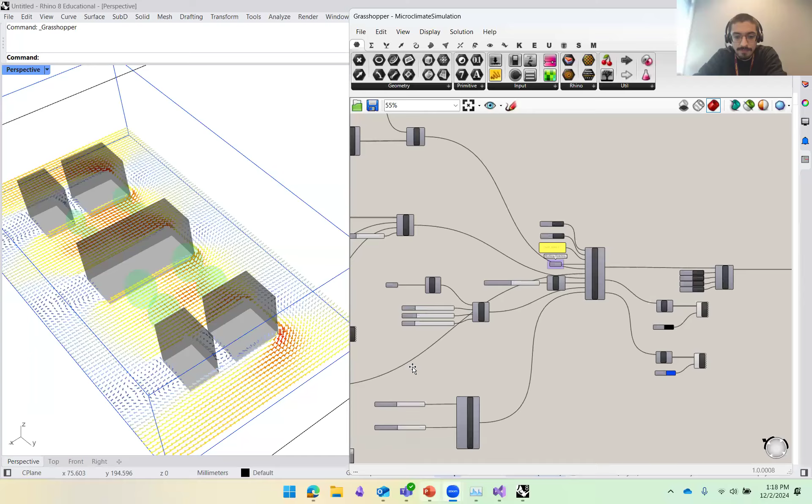Okay, thank you Patrick. Do you see the slides? Yes, we can see the screen. Thank you, okay.

Good day everyone. We're part of this team called Microclimate-UMCF, with UMCF coming from the Urban Microclimate Foam Solver. Our full team is quite large - we have Patrick leading this effort, me, Gonzalo, in charge of the main development of the plugin architecture. Marcelo here is also supporting that effort and working on some of the testing of the plugin. Chinmay is working primarily on the vegetation parameters, and Shruti is designing some case studies so we can run this on.

Sina is not here, I believe - he was supporting us on the technical side, the validation. And Ray, who's also not here, supported us in some testing, fixing some bugs, and general technical problem solving. Like Patrick said, this started with Perkins and Will as an internship when I started the development of this, and also with seniors from the Toronto Metropolitan University, so in a way it's like a partnership.

I'll be talking primarily about Metafoam, which is this platform we designed to, in broad terms, facilitate the implementation of Grasshopper plugins based on OpenFOAM cases. The Metafoam platform has three steps I want to talk about.

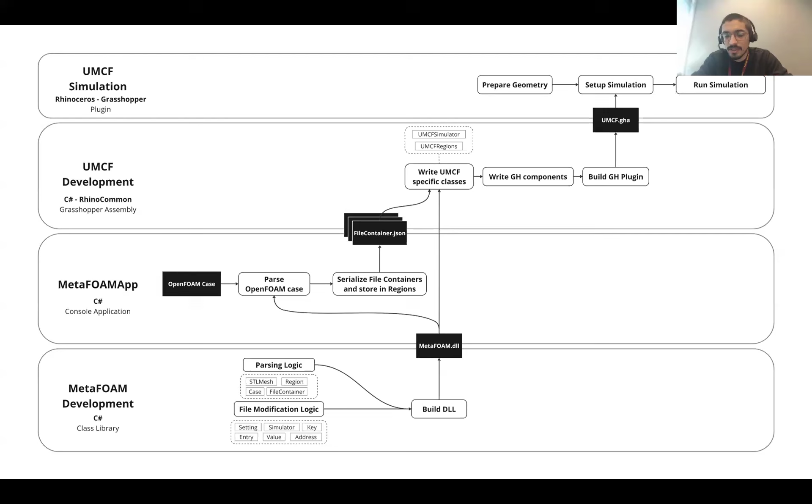So the first one, the MetaFOAM class library, is the class diagram. The first step here is these three classes that are used. The purpose is to just allocate or contain multiple files.

Directory containers are the more basic abstract class used by the case and the region. This one only provides some functionality to get file containers. The region itself is pointing to a specific OpenFOAM region, such as air, buildings, or vegetation.

This one stores all the files particular to that region. It also has some logic that can be used later on by a user, can be filled by a user to actually modify the files the way they want.

And the case itself is just a collection of multiple regions. It also contains all the files that do not belong to any regions, which are primarily for the global type of settings of the simulation.

The file container is probably our main class here. It's an abstract class. It contains the address of the file and the content as a C# dictionary. And this dictionary is a nested dictionary of a string and object. There are 4 types of them.

We have the dictionary container, the generic one that contains most settings and the initial conditions of an OpenFOAM file. The list container has weather-related information, which is usually time-based. It's way more simple. The text container is a generic container for anything that's text-based that doesn't necessarily follow the OpenFOAM syntax. And the mesh container just carries the geometry you will be modifying in Rhino.

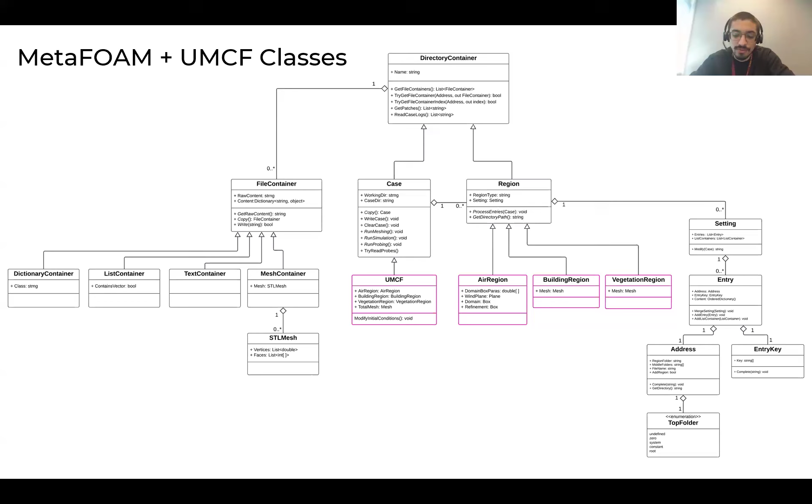This is the same diagram, but now the main difference is that the developer comes in and inherits from the existing classes—from the case, the UMCF class, and from the region we have air, building, and vegetation. So they come in, take the existing library, and add any methods they need to make this work.

So the UMCF one just contains all the file containers. In this case we have three types of regions: air region, building, and vegetation, like I said before, and each one has its own specific requirements. The air region contains information about the simulation domain, including the wind direction and parameters defining the box. The building and vegetation regions contain a mesh with the geometry required to run the simulation.

In addition, they also override the process entries method. This is called on the case, which contains all the file modifications collected through Grasshopper inputs.

The overall features of this plugin: you input the geometry of buildings and vegetation, define a wind speed, direction, building material, and vegetation properties, along with a weather file, start day, start time, and duration. This will output, per hour, the temperature, absolute humidity, wind velocity, and pressure—the main relevant ones. There are more, of course.

In the Grasshopper definition, it looks like this. We'll go through it one by one here.

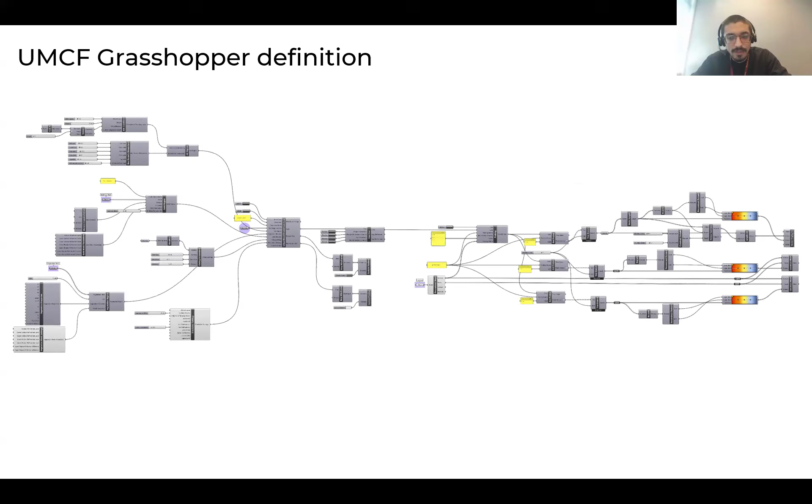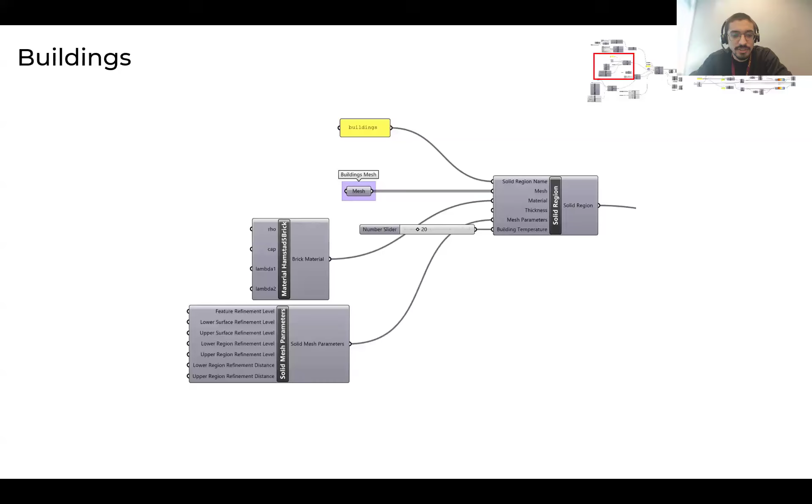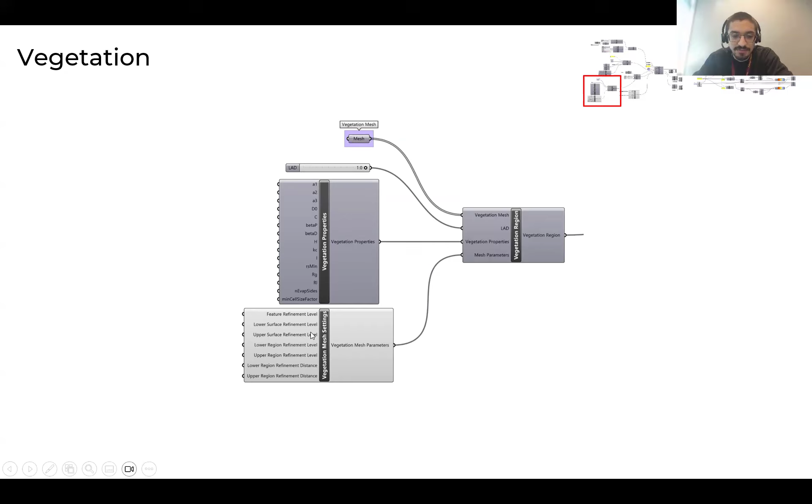For the buildings, you have the actual geometry of the building, the material of the building you're going to use, and parameters defining the refinement of the meshing. Similarly for the vegetation, you have a specific input for the LAD, leaf area density, an array of vegetation properties that Chinmay will be talking more about, and then similar settings for the vegetation mesh.

We also have, of course, several run settings. The main one we're using here is the number of CPUs we're going to run in parallel, and this is the max fluid iteration, which we modify to make the simulation faster when we're testing or not.

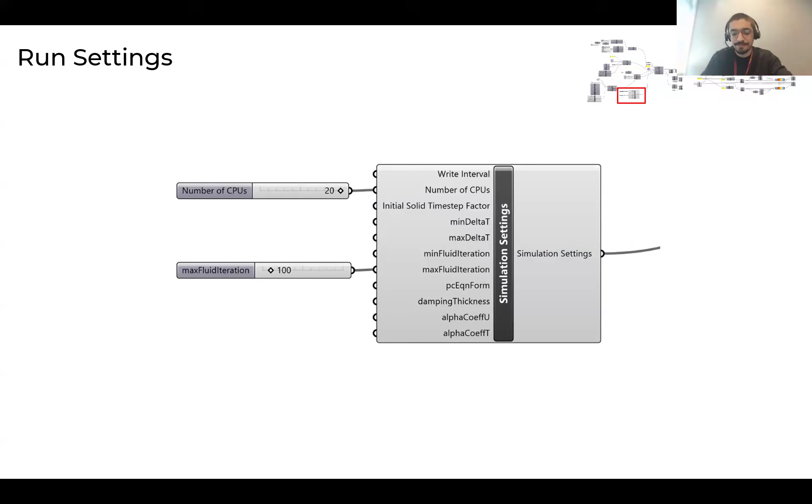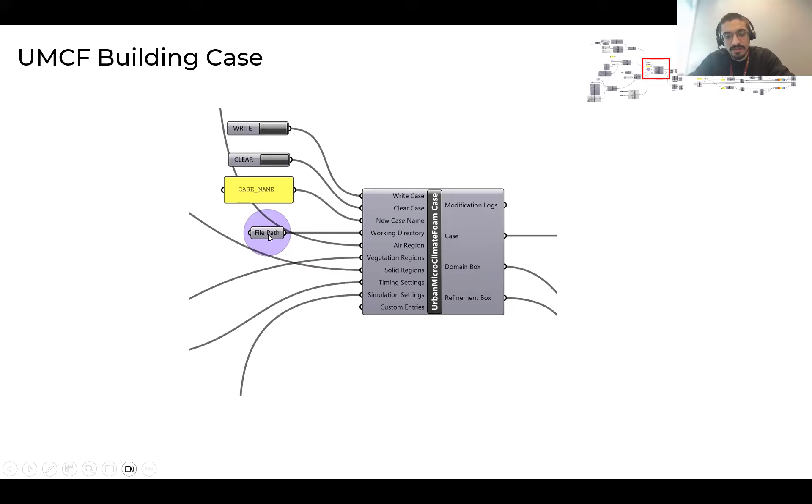And then we have the component that takes everything together, the case. This has an input to just write the case and to clear it. You can also specify the name of the case and the working directory where this will be written.

And then you can just run the case. You have some options to run this in parallel or single: first prepare to get the meshing, and then the running simulation itself.

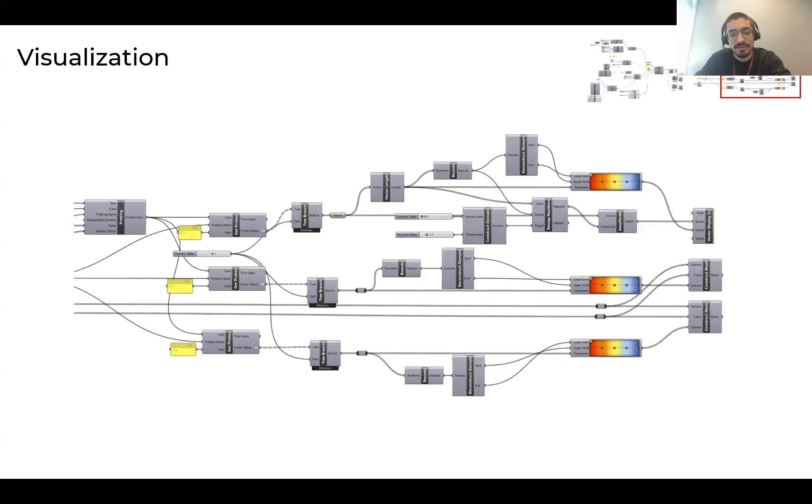And these are just vanilla components from Grasshopper here for visualization, which allow you to see the results directly in Grasshopper, and you get some quick examples, an animation of the results of the temperature and the wind velocity.

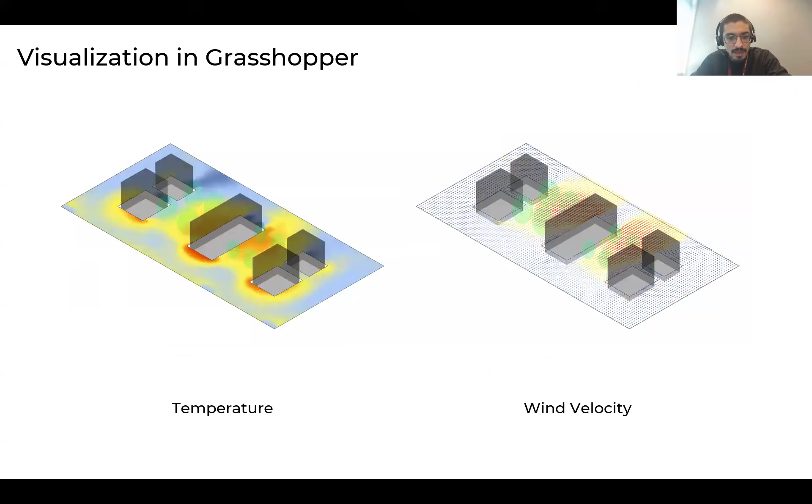But we'll see more of this from Gonzalo later on. And that was it from me. Now Marcelo will take it with the next part.

Hi, can you hear me? Yeah.

Yes, Marcelo, let me say one sentence for the ones that joined later. So Gonzalo led this project, which came out of his internship at Perkins & Will, and there were four more students who investigated sub-issues or sub-problems related to this development as it pertains to meshing, vegetation, canonical test cases, and what am I forgetting? Is that it? And of course, Marcelo, who we're going to hear about right now. So yeah, please continue.

Okay, my work during the semester was two-sided. The first part was to add and develop additional features for the UMCF plugin for Grasshopper, mainly focused on visualization, just because before that we needed to rely on some viewers like ParaView, for example, and it would be a good feature to have some sort of quick visualization and further manipulation of the geometry meshes from the simulation domain results within the Grasshopper environment.

Next slide, please, and just keep going, it will be fast. The first thing is that there is an object called polyMesh that contains all the information related to the points, faces, and cells for the mesh composition of the OpenFOAM geometry, related to the air region, the vegetation region, and the building regions, or the solid region more generically.

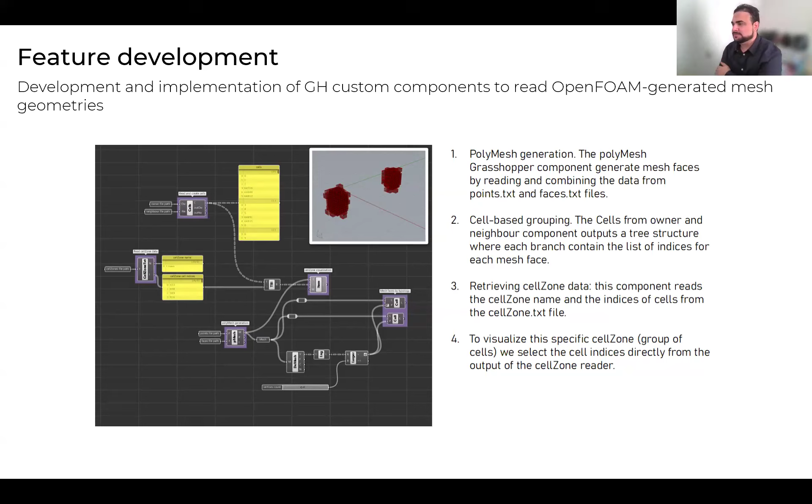So then we did a further optimization because the initial version was just an individual mesh for each cell. Since a lot of these geometries have a high amount of cells, we were able to create a single mesh based on the information, so it works a lot faster and allows further processing in the Grasshopper environment.

Finally, since the plugin started having more updated releases to be used, we integrated this into the UMCF case class to actually work and be fully integrated in the whole workflow of the process.

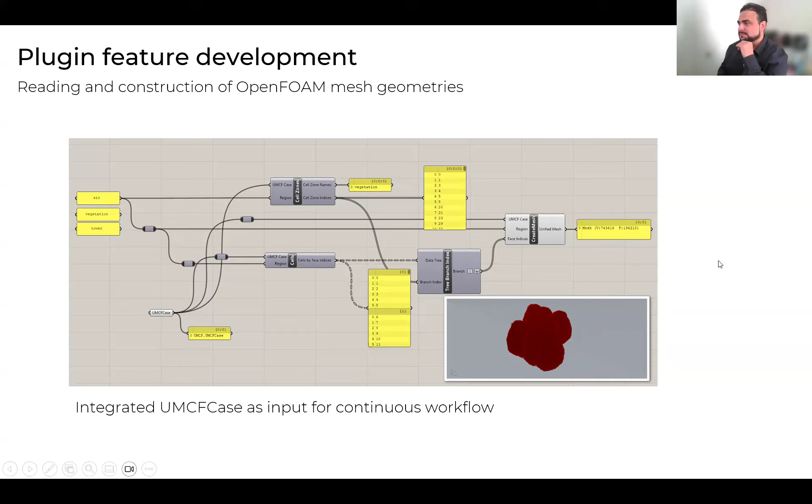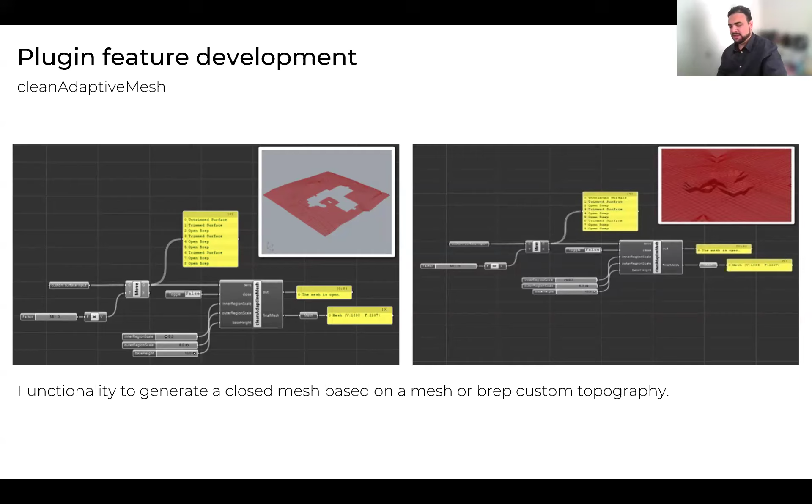This is another feature we worked on during the semester: the need to handle more complex topography geometries based on a custom input for a surface, a B-rep, or even a mesh that is not flat. This component is based on Professor Kastner's vanilla Grasshopper implementation, but we aim to build a more compact, more integrated solution into the whole framework and workflow of the plugin.

And then we need to do more testing, initially on performance, trying to solve individual errors, some related to memory issues and others to geometry issues.

So I was in charge of studying and finding relevant insights on the geometry of the trees. To begin with, I chose a small sample of trees with a pretty generic and arbitrary building geometry and performed a fractional design of experiments with a size of 16 to get the initial datasets, so we could understand how to actually build proper mesh geometry for the trees. That was the main issue.

There are a lot of parameters related to mesh quality, the functions that OpenFOAM uses to build meshes, such as the snappyHexMesh dictionary and castellated mesh controls. But based on that...

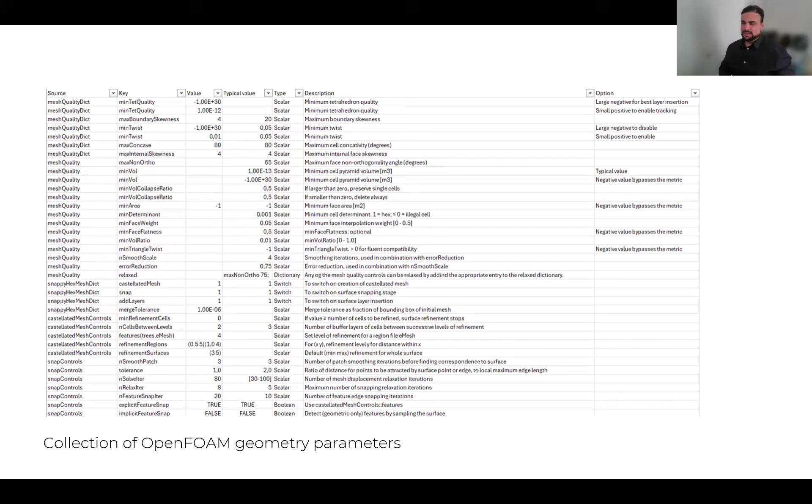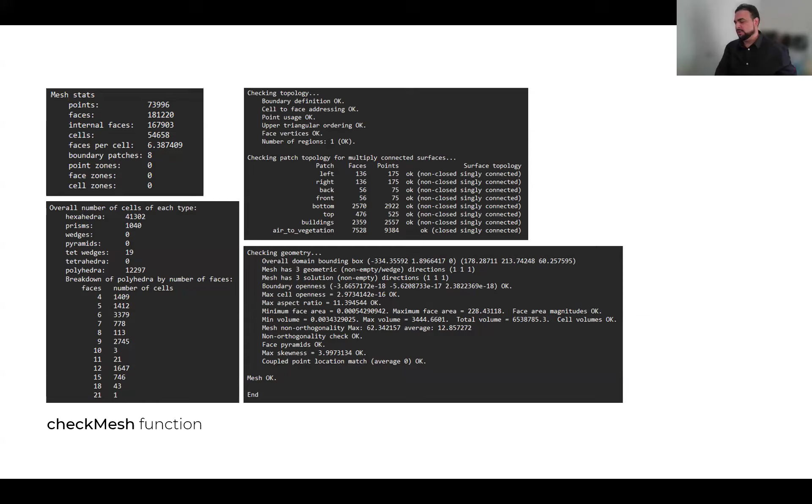We basically rely on the check mesh function that tells us if a mesh is good or not. If it's good, the simulation is more prone to run successfully, so the geometry has an overall healthy status.

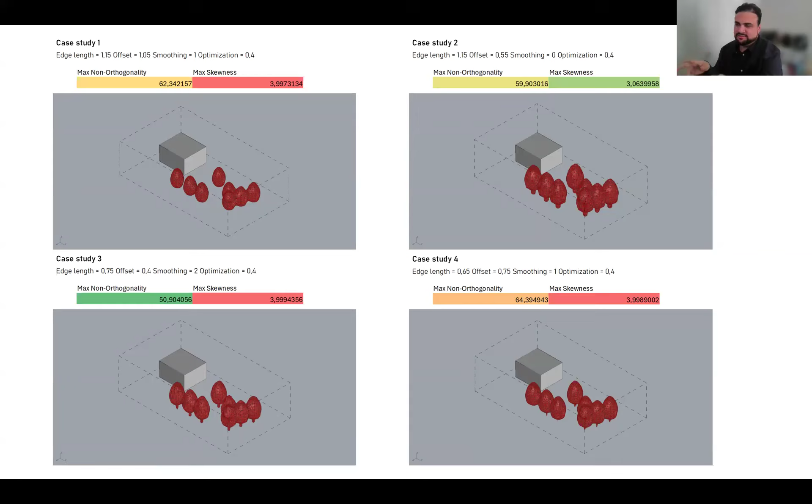These are results of the fractional design of experiments we performed, using the shrink wrap method from Grasshopper to build a single mesh containing all the tree geometries. For max skewness, the acceptable value is up to 4.0, and max non-orthogonality is around 75. The values are really close, but the check mesh function says, as you keep scrolling through the slides, all these results are qualified as good meshes. So we probably needed to do further testing to make this run consistently.

Then we ran into another hypothesis - this is another functionality we developed for the plugin, to visualize the sets that were created when the check mesh function outputs some bad geometries, for example low quality tetrahedron faces or cells with too large skewness values.

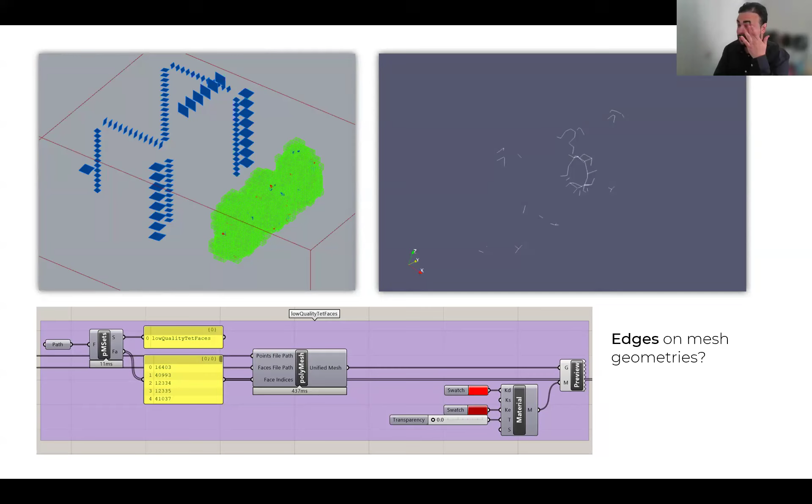We noticed there are some problematic edges on mesh geometries for trees in this case. So we manually modified the files that tell the solver how to generate the meshes, and we removed any process involving the trees or geometries that create sharp edges. By doing that, we were able to run simulations more consistently, avoiding problematic edges.

So then we started doing a benchmark process - please note this was all initially run on my own machine, then we started using a powerful server to avoid memory problems during simulation with large geometries.

We found that modifying the refinement levels by lowering one value, the total amount of cells in the simulation decreases drastically, but it doesn't really impact whether the simulation succeeds or fails. This is more tied to the overall domain size.

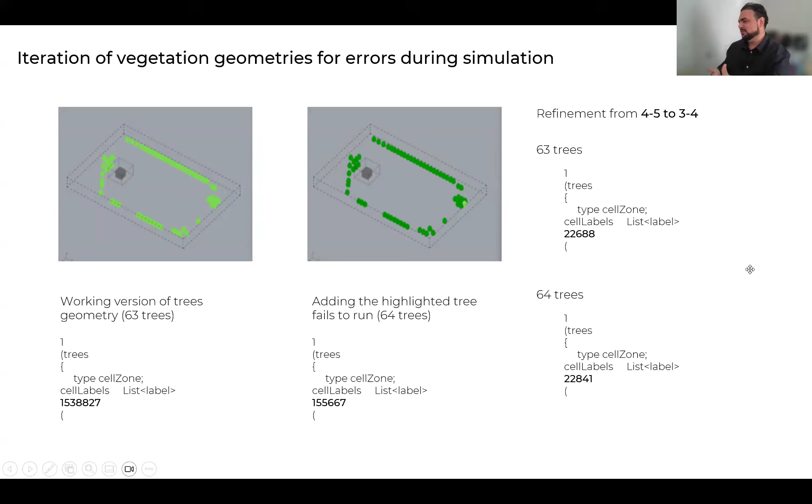So in the end, we started to run since the plugin was more robust to actually work, and we started to do further testing. We needed to see if the temperature values were actually working, and we got some conclusions based on this.

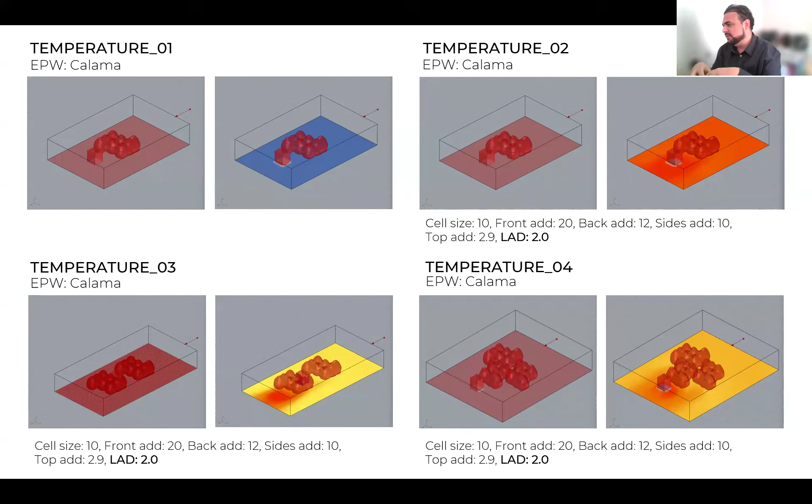So we chose an EPW file from Calama, Chile, which is a desert-like weather. We started to see what kind of configuration or setting we need to actually have significant changes in temperature values around, under, or next to the vegetation geometries. Using these generic and default settings, we were not getting much difference, maybe because the simulation domain is too small. It needs to be larger or enter a steady state to actually represent and give more consistent results.

But then we tried to see, okay, is the solver actually doing its job? And we set a completely out-of-scale LAD value of 100. Chinmay will explain this more in depth, but we were able to get the temperature differences more significantly around the trees. So this is expected behavior, but obviously with a smaller LAD value.

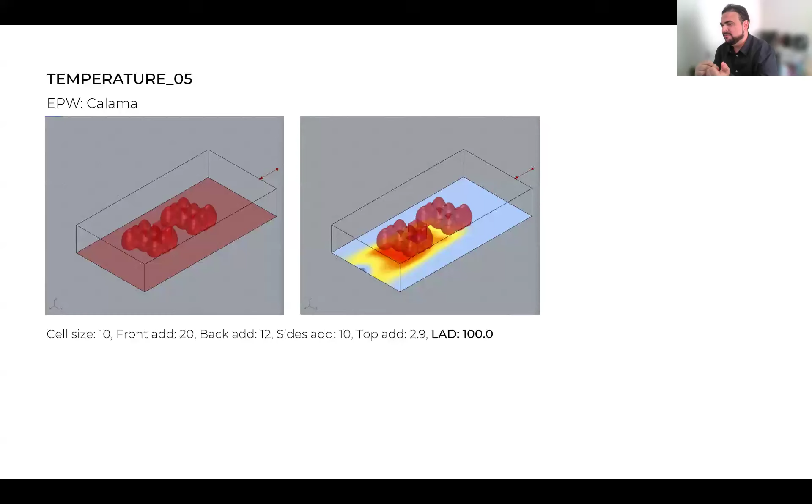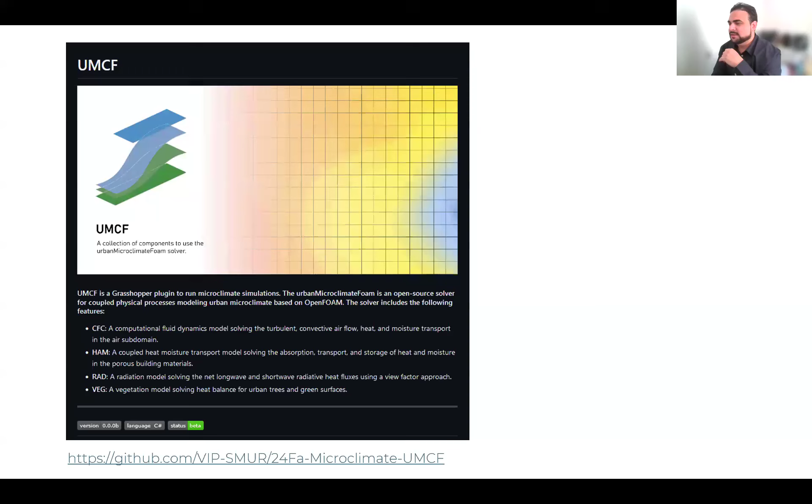Right, Jimmy, before you jump in, we have one question. Maybe we can take two questions actually. Maybe Gonzalo can take just half a minute to address these before we forget what they're all about. We're moving into applications now.

Where can this also be downloaded? It's on the package manager still, right? Is that still the case? Yeah, that is the case, yes. If you type UMCF on the package manager right now, you should see it in the plugins.

Yeah, so we have one question for Gonzalo, one for Marcelo. Maybe while we're on these topics, you can quickly address them in the chat. Answering Tyrone's question for me. Maybe repeat the question real quick in half a sentence, since this is recorded.

I mean, the question is, could you share your thoughts on the technological level of the plugin and the necessity for its expansion? Usually expansion is needed - what limitations have you identified in this work, and what areas should we focus on for next steps? We suggest many. So I'm not sure what you mean by technological level.

Hi, hello everyone. My topic will be focusing on the influence of vegetation structure on the urban microclimate. As we all know, vegetation definitely has its impact, but to what extent?

There are many studies showing it can cool down the temperature up to 15 degrees Celsius in vegetated areas compared to non-vegetated areas. But is it only about the shading? Because even other structures provide shading.

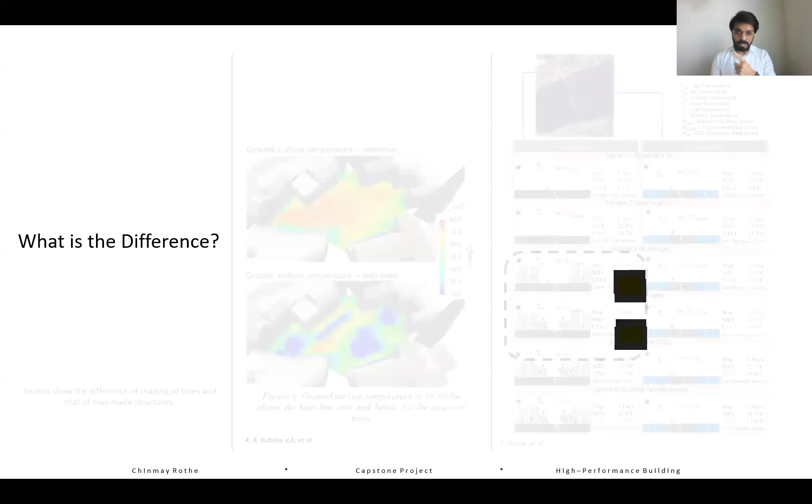This all happens with vegetation being present in that particular area. Many studies suggest better UTCI results when vegetation was included in the simulation, and ground surface temperatures were also reduced when studied with vegetation versus without.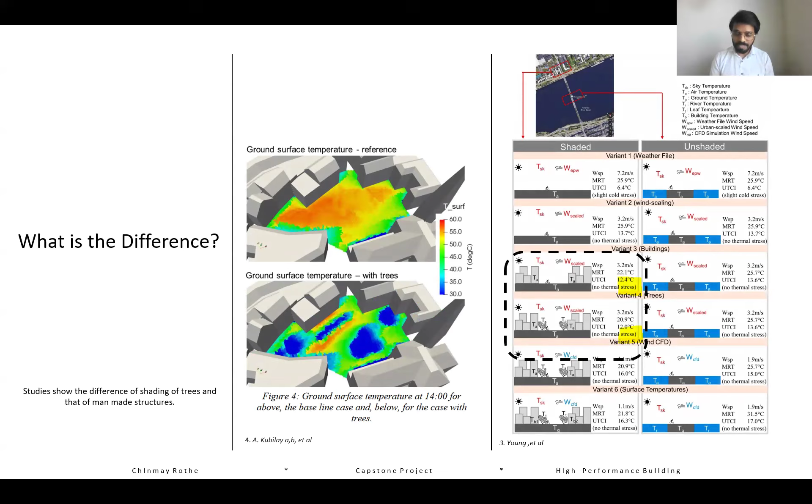This whole process of cooling happens when long wave radiation is absorbed by the tree, and it interacts with the surrounding air temperature in terms of heat transfer through evapotranspiration.

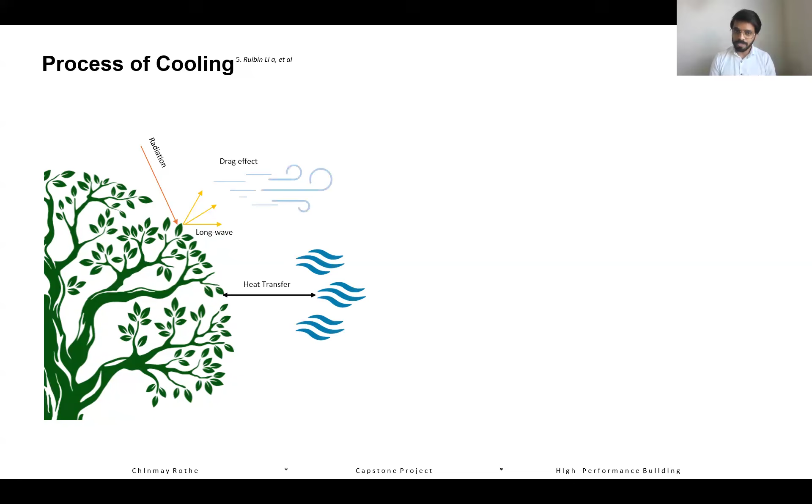What are the benefits of this vegetation? It not only cools down the temperature below the canopy, but also has an effect up to 27 meters, as per a few studies, beyond the park boundaries.

We have identified at least 6 levels or stages where vegetation contributes toward cooling the temperature down. For this study, I'll be focusing on the pedestrian and tree canopy level, specifically on how different sizes of red maple tree, the species I'll be studying for this topic, affect vegetation cooling and its influence.

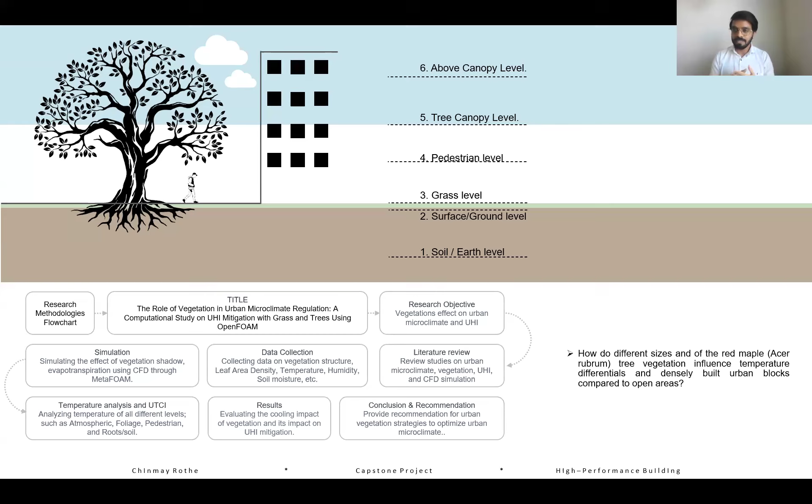In all of this, the density of the foliage is a crucial factor, also called leaf area density, or LAD. This is basically about how much leaf material is present in one cubic meter of volume of space. Every leaf has small pores called stomata, which are essential for this cooling process.

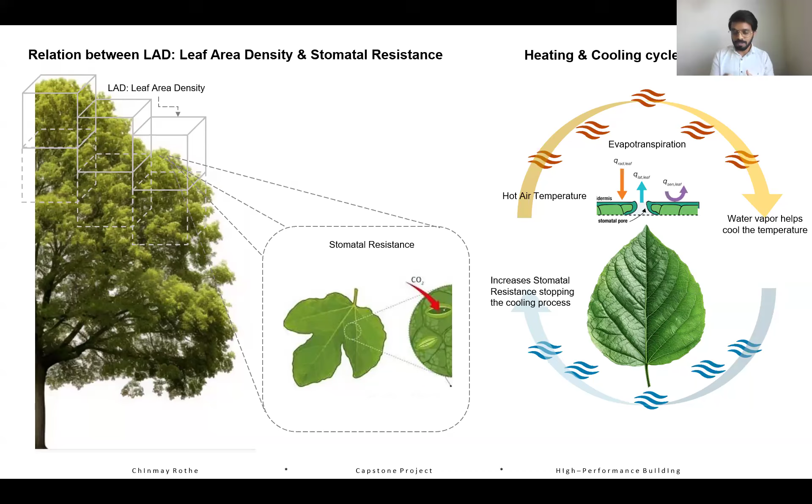This happens due to the vapor pressure deficit and the hot air surrounding the leaf; the leaf gets triggered and starts the whole process of evapotranspiration, releasing water vapor into the atmosphere and cooling down the temperature. So stomatal resistance relates to this particular point.

But all of these processes are very sensitive to higher CO2 levels, to places at higher latitudes, and of course the monotonous skyline. All of this is based on existing studies done on this particular topic. But the benefits include higher rain or good groundwater, good LAD values as I mentioned, and different height variations.

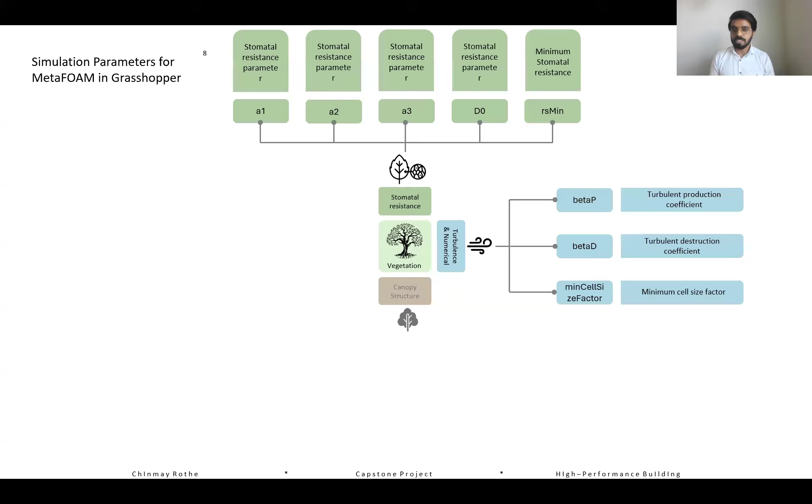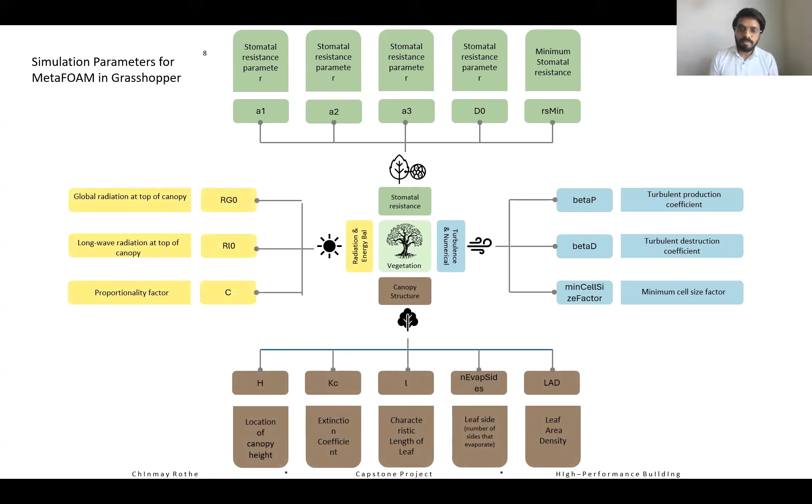In this study, as explained by Gonzalo and Marcelo, I'll be using this solver where it takes the vegetation parameter inputs. There are 16 vegetation parameters which affect the whole simulation pattern, categorized into stomatal resistance, canopy structure, turbulence, and radiation energy. There are multiple other parameters, but in the next slide we try to identify the values used as inputs and their units.

In this whole quest, we definitely found great data to actually use specifically for red maple. All my study is kind of using just one species right now.

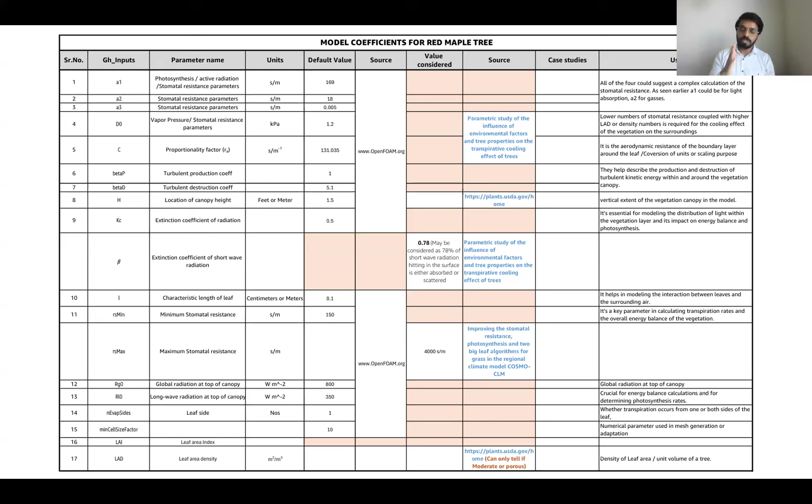So I'll be doing 3 iterations. In all of these, certain parameters' values will be changing, for example tree height, LAD, leaf length, and minimum stomatal resistance. Wind speed is kept constant for all iterations. At the end, I'll give a comparative analysis without tree iteration, as well as with one more in a different month and with longer duration.

Starting off with the first iteration, the whole layout of these iterations will be similar henceforth. It is all about understanding and analyzing temperature, moisture content, relative humidity, stomatal resistance, and leaf temperature, because all of these factors have potential for cooling down the temperature.

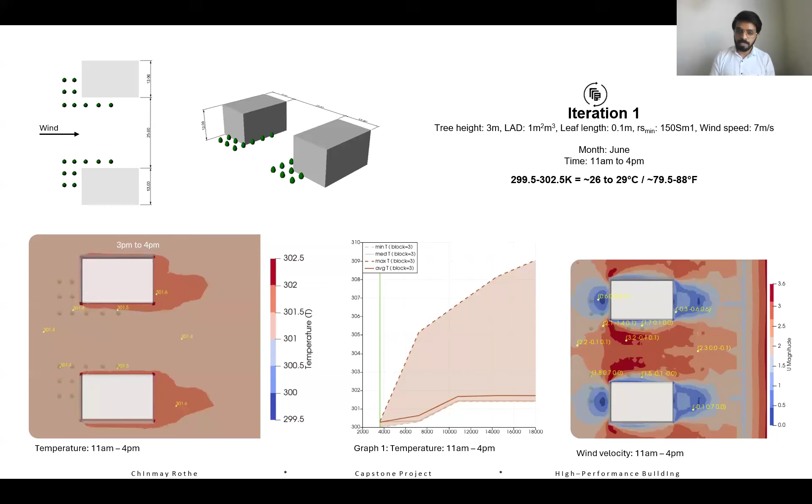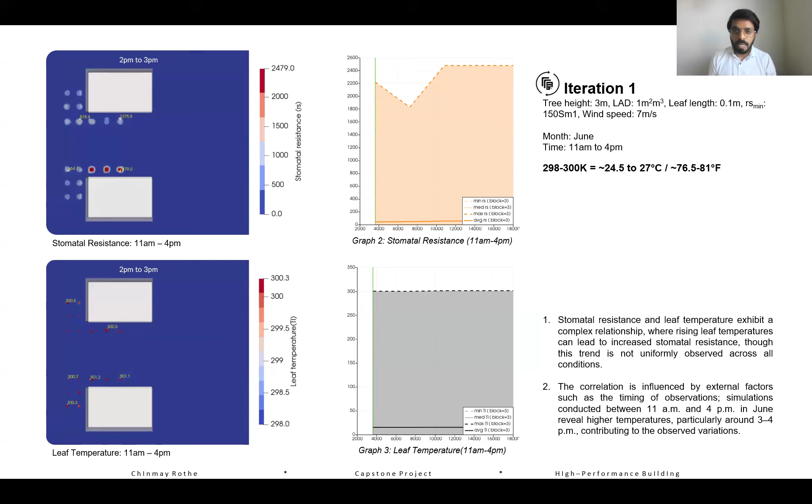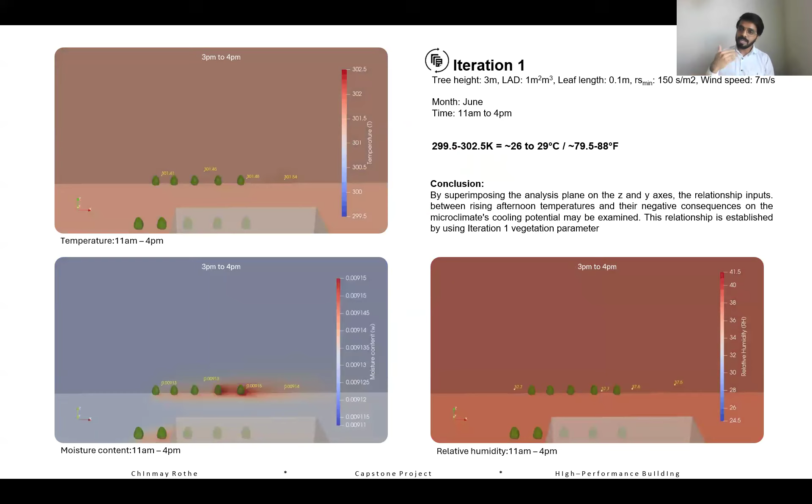When we analyze temperature, moisture content, and relative humidity together for this iteration with tree height of 3 meters, with the LAD values and leaf lengths shown on top, we identified that smaller trees are getting adversely affected by the harsh environment outside, because it is June from 11 a.m. to 4 p.m. It's kind of not helping the tree cool down the temperature.

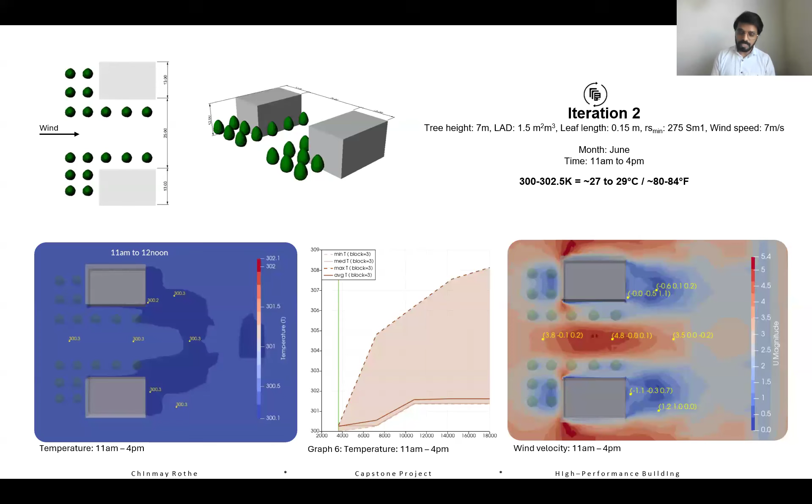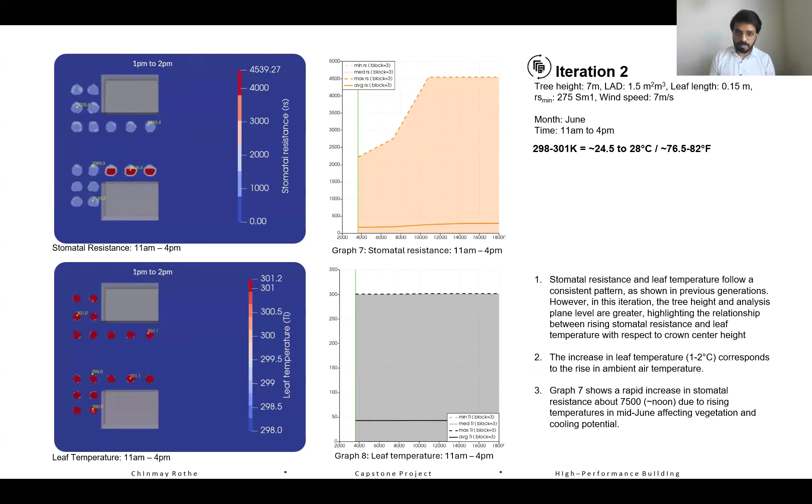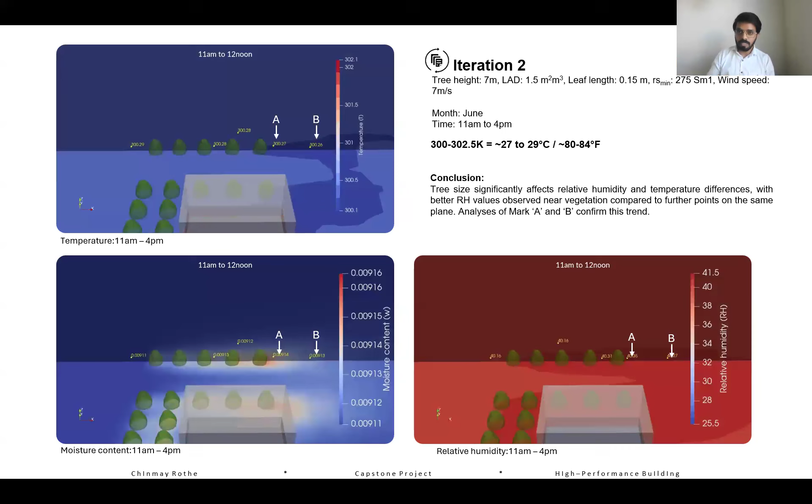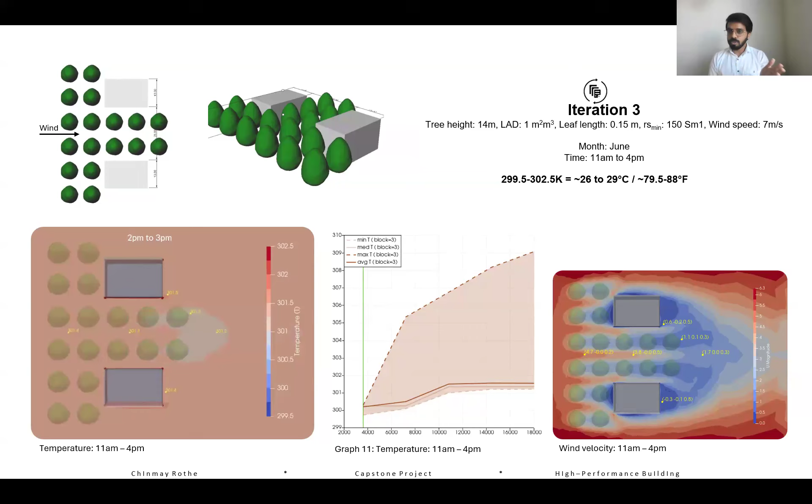Next, please. Now iteration 3 is with 14 meters of tree height. So there were 3 tree heights: 3 meters, 7 meters, and 14 meters. For 14 meters, initially everything looks fine and similar, because all the temperatures are around 26 to 29 degrees Celsius, or 79 to 88 Fahrenheit.

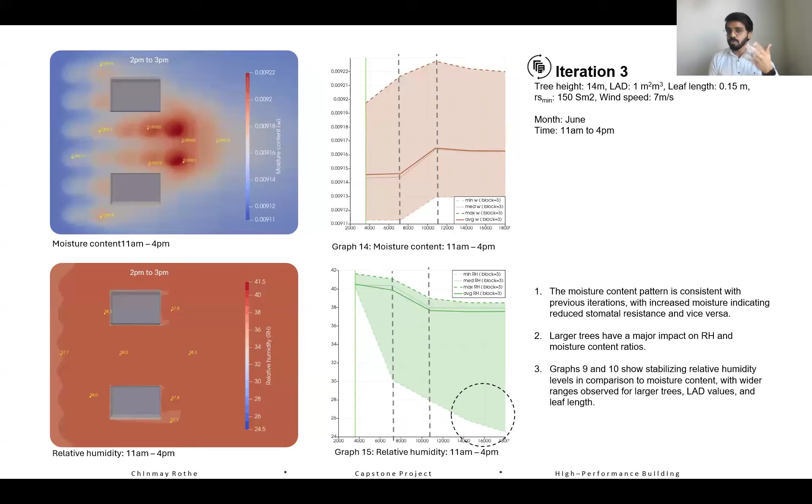Next, please. Again the same thing, but here I identified a point below a tree canopy and one above it. So it's pretty evident that the air temperatures and relative humidity are better below the canopy as opposed to above it. Next, please.

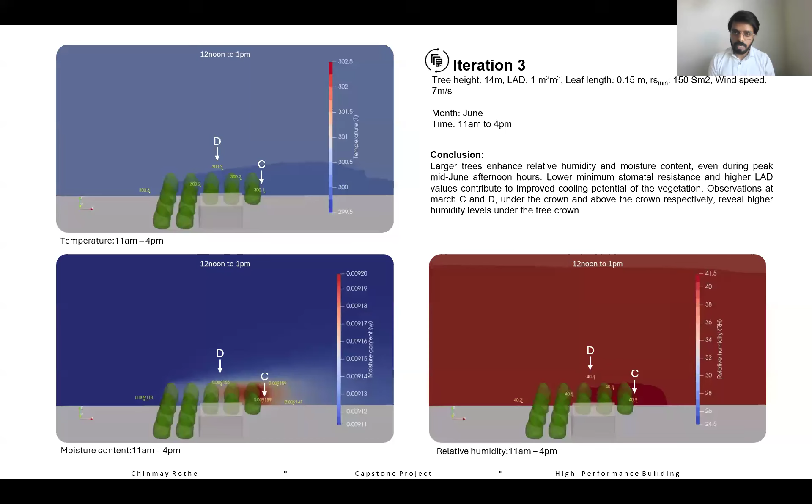Now, this iteration, till now, what we've identified is not actually cooling down the temperature. Everything we are seeing shows the air temperature still higher because relative humidity is not getting that much higher. So I wondered why it's happening, because the solver is performing perfectly fine, and even the trees being there has some effect on it.

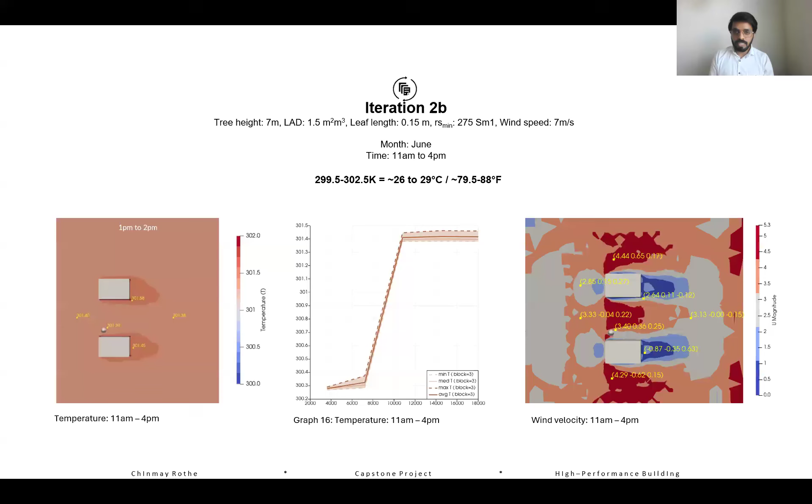So I tried this and saw that when I put one tree instead of so many that we saw earlier, it actually doesn't change anything. There are no much variations. It's just where the tree is that you can see the drag effect happening, and other numbers changing here and there. So it's kind of like a desert situation, where not much is changing in terms of the air temperature or the relative humidity.

Next, please. And finally, what I tried to do is change the month, keeping all the parameters the same for the 7-meter height iteration, and also the duration of time, which is now from 11 a.m. to 7 p.m. Here it was very interesting because we can see the relative humidity shooting up to almost 70%. In fact, moisture is also increasing.

So now we are getting where we actually wanted to go, where moisture is increasing and relative humidity is increasing. This is just one of the factors I'm focusing on for the trees, which is essential for cooling down the temperature.

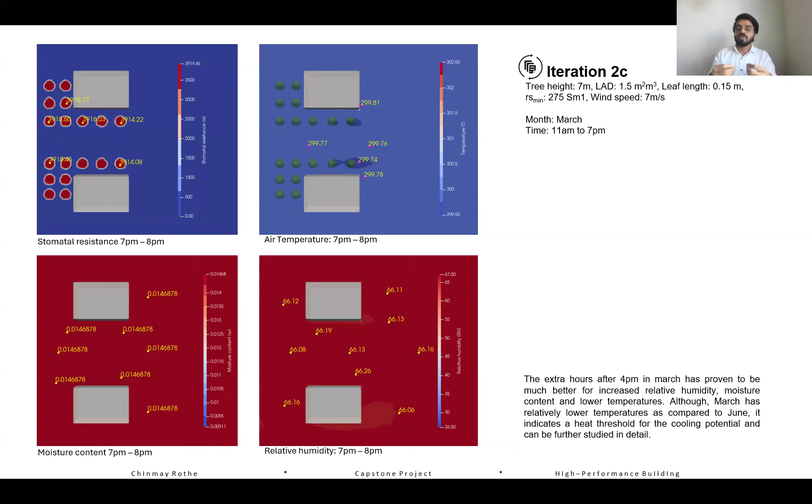Next, please. These are the graphs which show the perfect change for stomatal resistance getting decreased, relative humidity increasing, as well as air temperature dropping down. So it's very interesting to study that. It definitely tells us that which month you're studying matters, and it's not about 1 or 2 hours, but about the whole day, or maybe multiple hours that you study, to identify how that affects the cooling potential. Of course, the air temperature in March also goes down as we go toward 7 p.m.

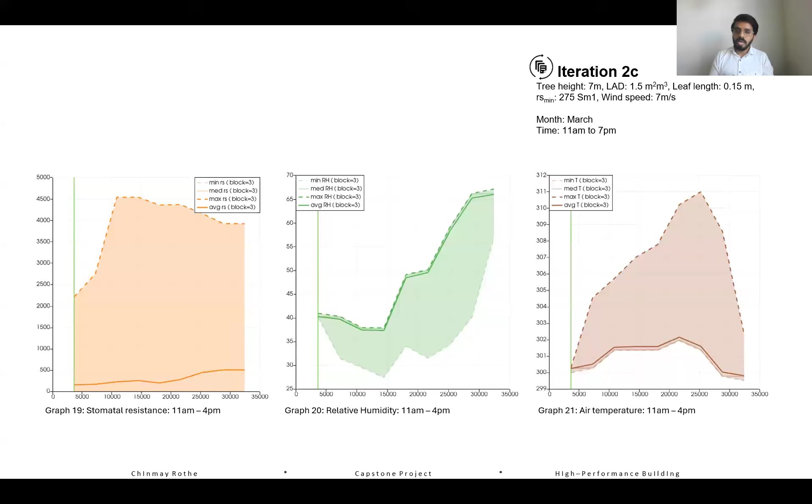Absolutely. In order to use it in day-to-day life or for designers, I'm pretty sure no one is going to use all 16 parameters and change them. So having said that, we can definitely compartmentalize it by saying as per the region, as per the tree height, because right now what we did with design of experiments is that it's kind of also changing the tree leaf length with the tree size. So in a real life scenario, if we just try to identify how the tree grows, sometimes it's a constant process where we can understand that a certain tree leaf length and certain tree size with stomatal resistance are pretty much the same.

So we can definitely say, let's say A, B, and C are the inputs, and that's it. So if you want to use different types of trees as per the month, we can use them for that particular compartmentalization.

I feel that this can be done back end and explained to the designers that if you want to use this for this particular tree this month, just use A or B or C. It's easy to say, but I think we can definitely use it that way, because not all 16 parameters are essentially necessary to take into consideration for a general urban design or planning analysis. So yeah, I think we can do that, though more detailed analysis is necessary.

Thanks for me. There's one more from Tyrone. Maybe we can do a second, then we have to move on.

I think Chinmay's just identified something — there's a lot of space here for future work. And to Marcelo, to your question, I don't think it's a simple one, in terms of what species and time. It's more what Chinmay talked about. What we'll have to figure out is the translation — he's talking about stomatal resistance, leaf length, and there's a translation we'll have to do. But designers need to come up to the plate and update their knowledge, really understand stomatal resistance, because if you looked at the presentation, that's what's causing the cooling around this tree.

To me, it looks like little vents that release moisture vapor — that's how this tree actually does its job. So I'm going to push our designers; they're going to need to learn more about what these trees are actually doing, so we understand when we design what's the right kind of thinking to give in terms of our intention.

But I think what he's found is going in the right direction. There's still more work to do, but we're going to have to ask our designers to step up to the plate and learn more about this process. I think his work is going to open that up more in terms of their education, so we may have to invite Chinmay to give some special talks on some of the work he's figured out here. That's probably where I think some of this is headed.

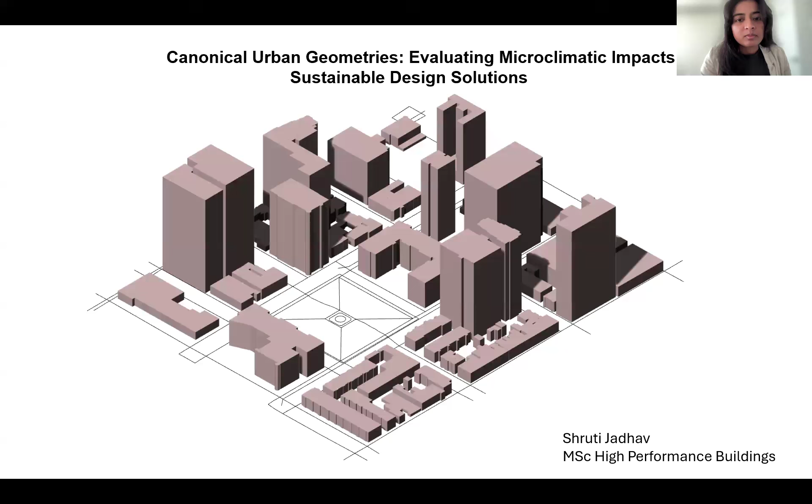So to begin with, we are all familiar with the concept of urban heat island effects, where basically cities experience slightly higher temperatures compared to their surrounding rural areas. These urban zones contribute to over 70% of global energy consumption, largely driven by the microclimatic conditions prevalent in the city. Urban heat island effect impacts us across various scales.

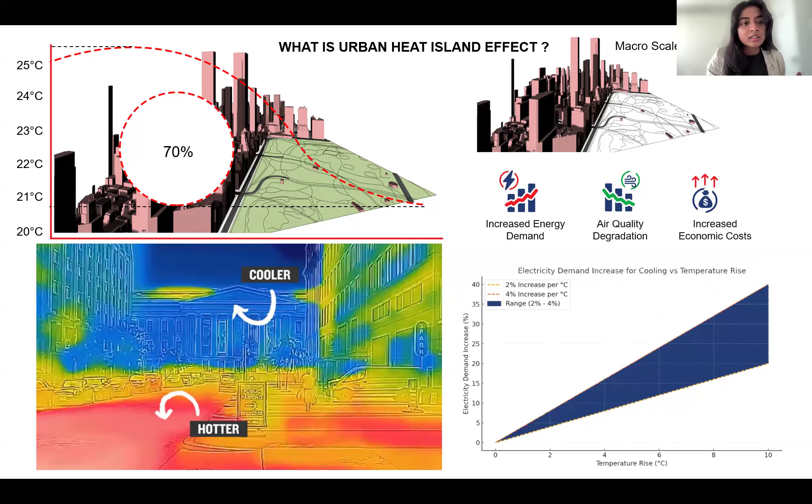On a macro scale, they drive up the energy demand as city temperature can rise by 1 to 7%, leading to increased cooling needs. This effect also degrades air quality, intensifying the formation of ground level ozone, because even a 1% increase in temperature can shoot up ozone levels by 5 to 10%. This is directly proportional to increasing economic costs to heat and cool the buildings.

At the meso scale, which is basically our neighborhoods and communities, the impact of urban heat island effect is more localized, so we see disproportionate heat stress. Neighborhoods which have more vegetation versus neighborhoods which don't, the temperature difference is between 3 to 5%. Low-income households which do not have access to many green spaces, mostly on the outskirts, experience higher temperatures.

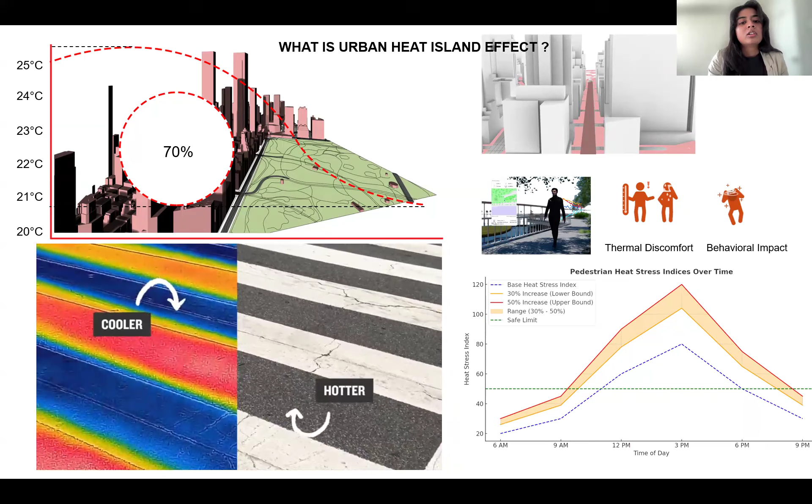At the micro scale, which is basically our pedestrian level, which we don't talk about often, in this climate it's pretty difficult to walk, and it actually causes behavioral impact. People don't prefer walking, they prefer taking their car, because the streets out there are too hot for them to be walking comfortably.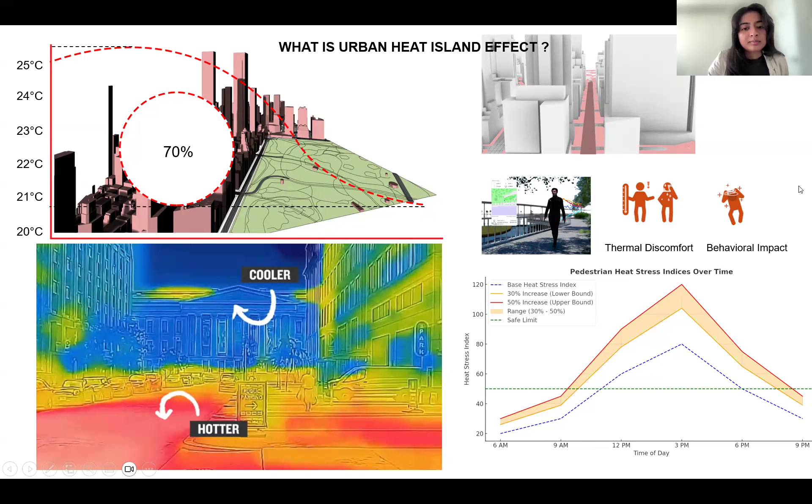This phenomenon definitely raises concerns for researchers and urban designers, emphasizing the urgency of addressing this issue. So in today's practice, we definitely use a lot of simulation tools to understand how to design our cities and how to go about our urban practice. The traditional approach is basically where we use an EPW file and see where the sun direction is, how the wind direction is, to conceptualize our design.

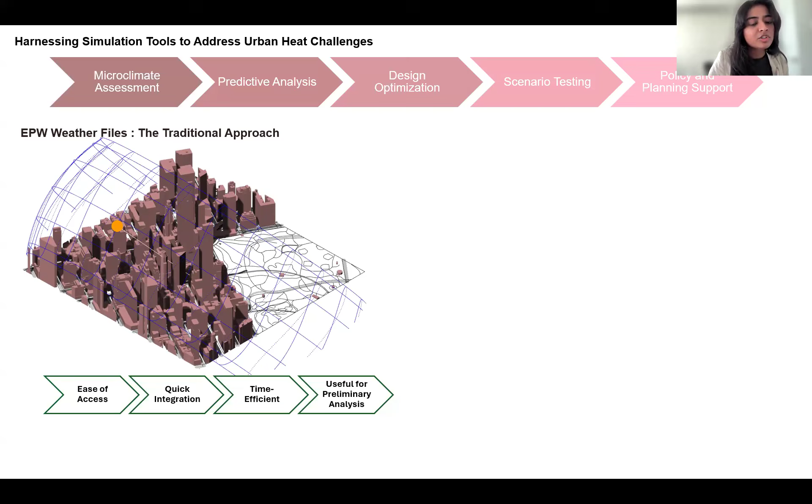Although it's easy to access and it's time efficient and used by preliminary design, what it fails to address is what happens at the ground level or at the pedestrian level. This data is very generalized and lacks precision and cannot calculate for extreme weather conditions.

So the question is: is it the buildings or the planning? This is where canonical geometries actually come in picture.

These geometries are done through thorough research as to how cities were developed, how urban design started, and how it's still in practice, to create this set of repository where we can pick this grid up, put it on our site, check how the microclimatic situation is there in that particular weather climate, depending on how the city was designed or how we want to design it, see how the microclimatic situations are, make a little bit of iteration, and at a very early stage, get a good idea as to how we should go about the conceptualization of the design.

Because they're standard repositories, we have consistency throughout, and we can make rapid decisions, and we can scale them and adapt different solutions and iterations to see what fits best.

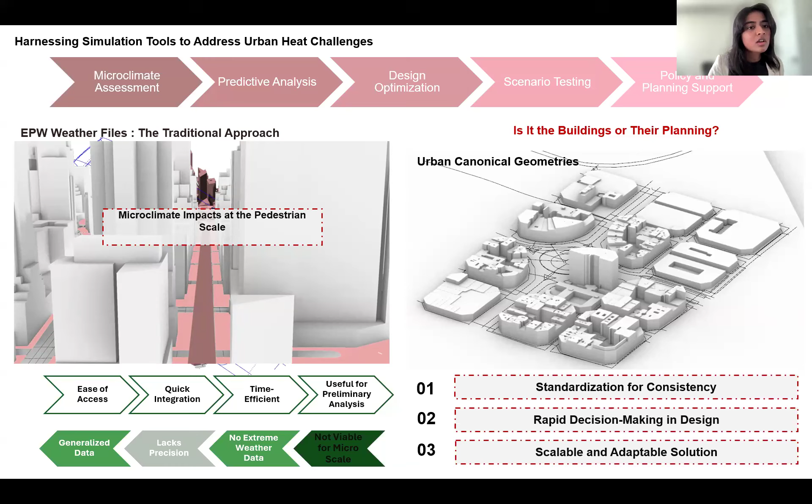If you see, this is basically the geometry that I'm going with, which is a 4x3 grid, which is suitable for large scale. We can scale it if we want large scale urban projects, or just omit blocks if we want to see what happens at the smaller scale.

It's efficient because it's faster to set up and reduces computational load, because the end goal is obviously to have these pre-simulated, so you just instantly get an idea as to what's happening. There's scalability and global relevance, because the typologies that were studied across the globe, different typologies, give you a bigger picture of what's happening everywhere.

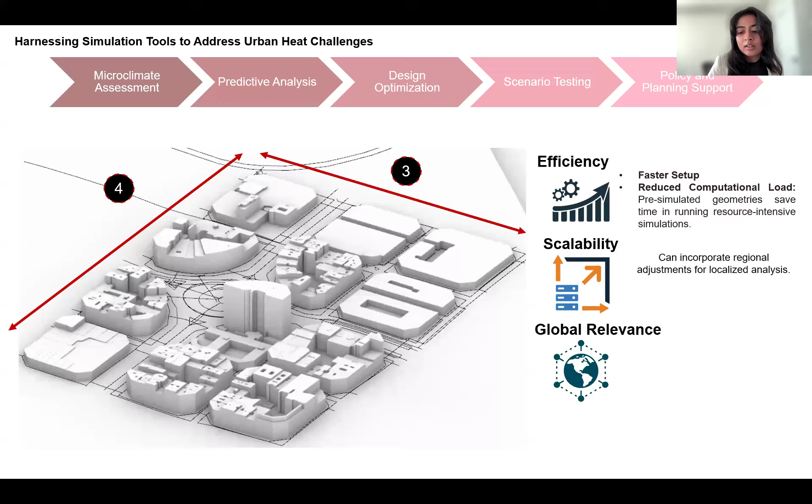So now when I was thinking and studying as to what typology or what cities or what geometries I actually need, I had to dive into the base of what affects the urban microclimate. First was street: the orientation of street affects wind flow, solar access, and heat distribution. The blocks, depending on their layout and size, affect the same; buildings, because of their height, design, proportion, and placement, can affect microclimate as it can trap heat or otherwise. Then public spaces, because of evapotranspiration, we can have a bit cooler environment.

Besides that, there were more technicalities that I wanted to explore and have in my canonical geometries in general, to cover everything. So we have a whole set of cases, different cases of things that can affect the microclimate potentially in our design. First was the standard deviation of building heights, as we know that tall buildings channelize wind effectively.

And also if we have narrow streets, it can create and trap heat. Similarly, the distance between buildings matters.

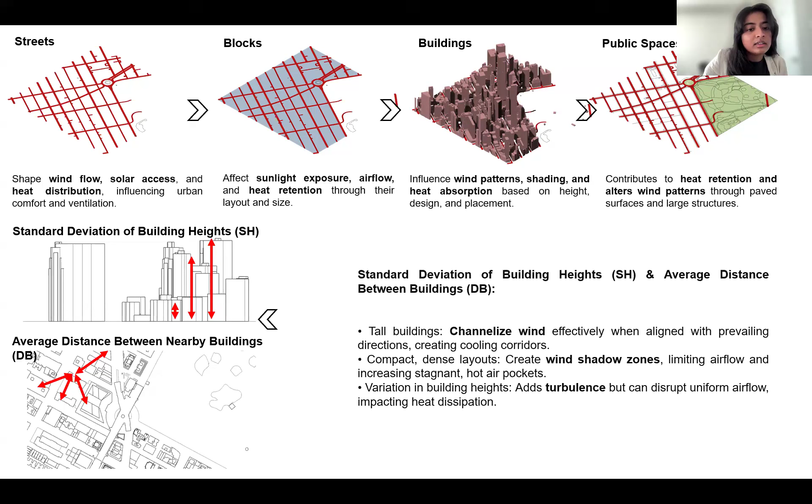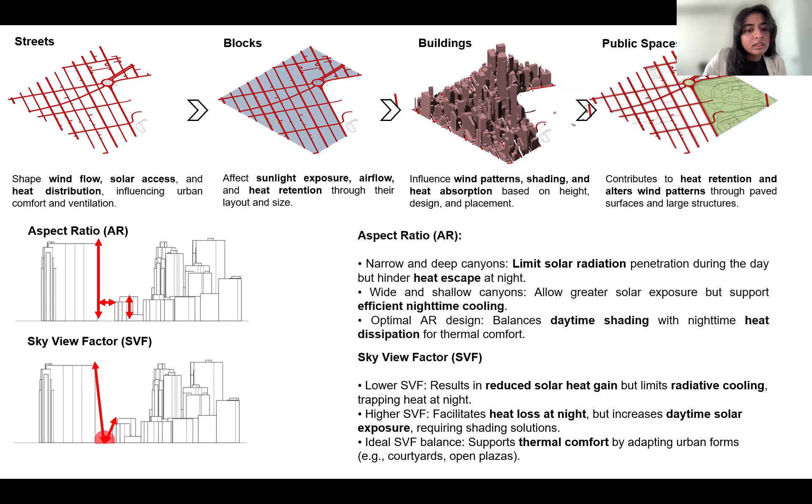So aspect ratio is the width of the street to the height of the buildings around. We want to know if air is rising up or trapped because the streets are very narrow. And then the sky view factor, which is basically once you are at the ground, how much sky is visible, to understand radiative cooling, heat loss, and thermal comfort.

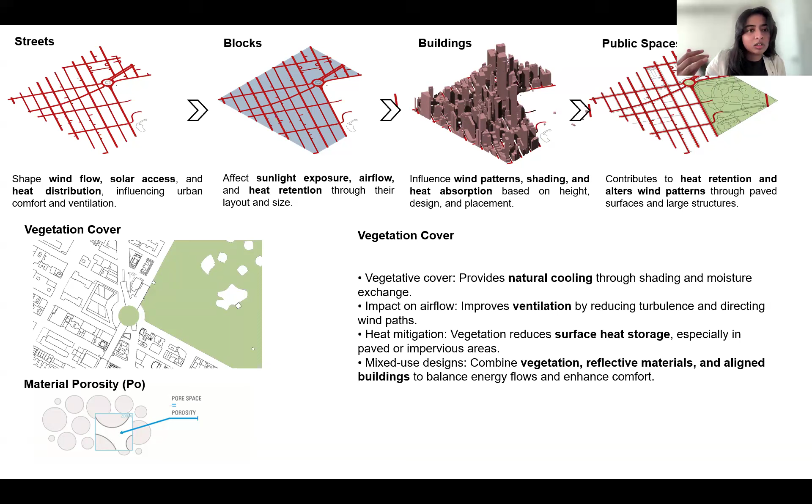So vegetation, because it helps naturally cool the environment. Also, porosity of materials matters—materials with low albedo trap a lot of heat, and materials with high albedo help not absorb heat as much. So I wanted to study these as well. These are basically the parameters I went by to select my geometries.

So, for example, rectilinear—I chose two case studies for rectilinear, which were Belo Horizonte, Brazil, and Chicago. Chicago has an east-to-west orientation, where we have skyscrapers and the streets are comparatively narrower, so we know it will accumulate heat in the buildings.

And the height of the buildings is different. Even the site selected for this is such that we have different zones in that one geometry—commercial spaces, residential spaces, and green zones as well—so we can basically simulate everything.

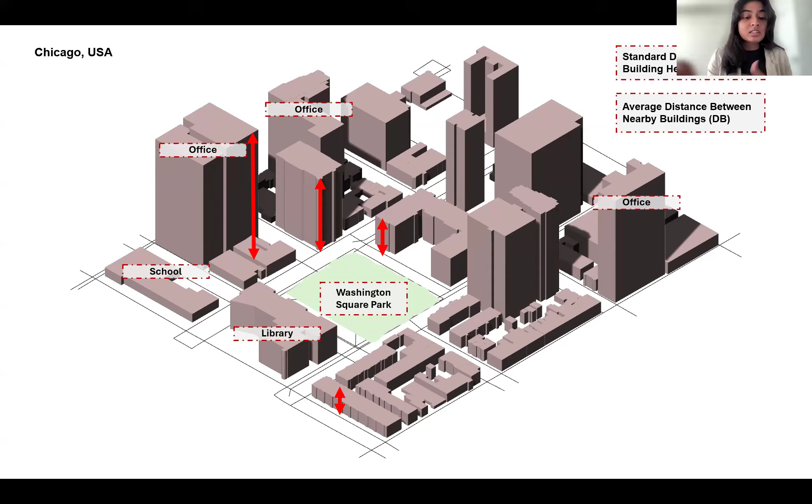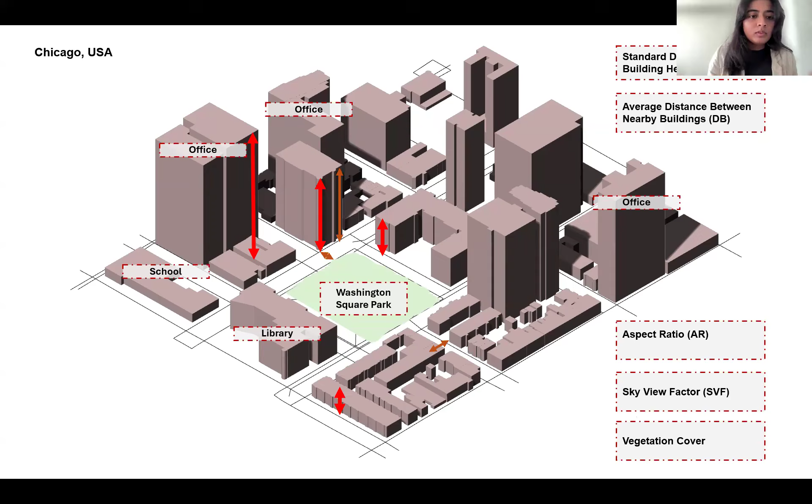The geometries were selected to get a bigger scale of height deviations, and we have differences in the distance between nearby buildings, aspect ratios, sky view factor, and vegetation cover. So all these geometries give us a diverse picture about all the factors that affect the microclimate.

Same with Belo Horizonte, Brazil, where the streets were designed north to south, which is actually good for reducing heat islands—so we have a comparison of type A versus type B. Similarly, with the radial grid, Amsterdam—this grid was selected next to a water body, so it will be good to understand how it minimizes heat, and the buildings are not that tall but have wider streets.

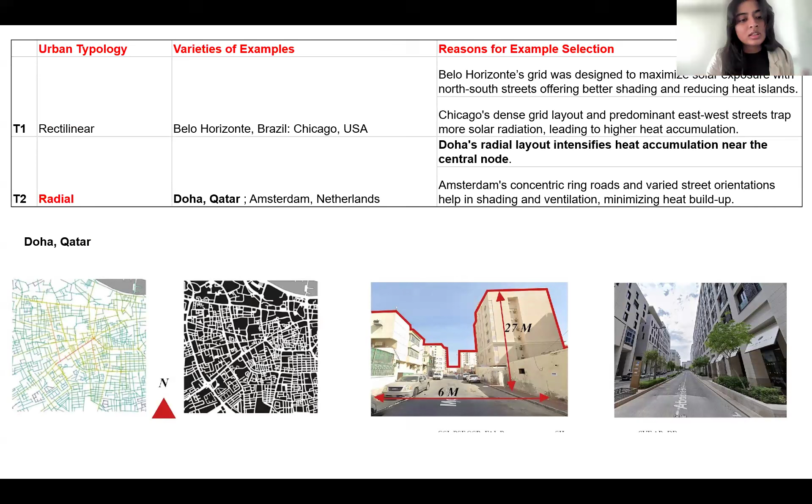So similarly, I've created this whole repository of 12 geometries around different urban typologies—rectilinear, radial, organic, checkerboard, and hybrid—which more or less covers the whole of current urban design and practice. Every geometry has a different reason from the above for being selected.

For future studies, once we have this tool developed, I hope we could run all these 12 through simulation, so we'd have pre-simulated geometries. For urban designers and researchers, it will be extremely easy—you just click and see how it works for your temperature, make tiny iterations, and then move to your design. Thank you.